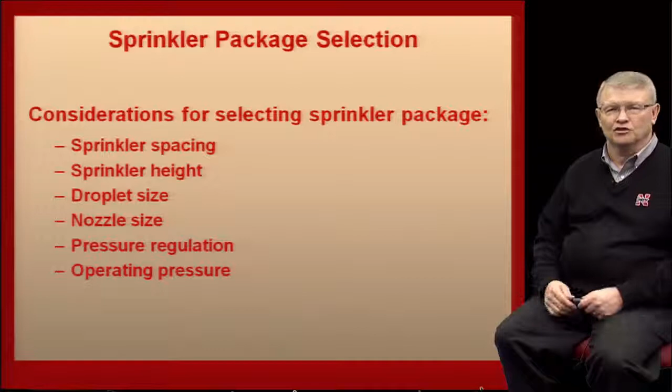And really maybe the most important piece on this whole part is making sure that pressure in your pivot is in the proper range. If I could stress nothing else, I encourage you to go buy a good pressure gauge, put it out on the outside end of your machine, and the pressure you're measuring should be 5 psi above the regulation pressure of your regulator. If you do that, your system's going to be in pretty good shape, unless you have a lot of worn parts. So let's walk through some of this.

When we look at a center pivot, we're looking at where does the water go? How can we most efficiently get this water that we apply to stay in the root zone and be available for crop water use? The spray and the evaporation of droplets, many times I'll hear from people that those numbers are 20–30% of their application. Quite frankly, we cannot show numbers anywhere near that amount. Maybe it's 5–6% on the upside.

And so generally, this is also driven a great deal by the size of the individual droplet that the sprinkler is emitting. And so if we can choose the right devices, we can get larger diameter droplets, as we'll see in a little bit. Those larger droplets are not prone near as much to this evaporation and drift. So for most cases in Nebraska, we're going to recommend going with that little larger diameter droplet, and you really can minimize some of these drift and evaporation losses.

Some of the water we apply stays on the canopy, as we show on the left-hand side. Now that water evaporates very quickly off the canopy compared to the rate of transpiration through the plant itself. What we have found in our research, though, is as soon as we wet this canopy, the transpiration rate basically drops to almost zero. And so there's a period of time while this water that's retained on the canopy is evaporating, the transpiration is reduced. And so the evaporation off the canopy is not a complete loss. It's kind of a net between what transpiration would have been and what the evaporation actually was.

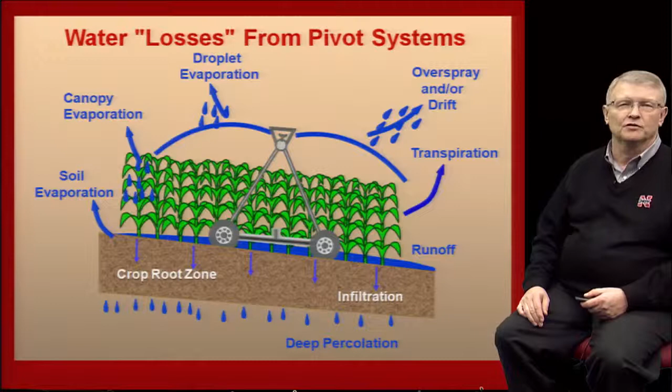We want to be able to select sprinkler packages that will minimize how much water is running off from where it's applied, either going to a low area in the field and leaching water and nitrogen out the bottom of the root zone, or actually completely leaving the field and being used by weeds somewhere offsite. So we're going to spend a fair amount of time thinking about this runoff issue. An important characteristic we have for a sprinkler system is what we call the wetted diameter.

So if I were to choose a low angle impact sprinkler like I'm showing up here, if I put that up on top of the sprinkler pipe, it might throw water 45 feet on either side of the pipeline. So I'm getting a distance along here of the wetted, what we call the wetted diameter. So generally the impact sprinkler is going to give us the furthest distance, going to throw the water the furthest distance.

If I were to put maybe a rotator, a product made by Nelson Irrigation Company, I might put one of those up on top of the system today. There's some new devices out that work real well up on top of the system. It doesn't throw water quite as far as the impact sprinkler, so maybe I only have about 36 feet of distance that's water on each side of the pipeline.

We're still putting out the same depth of water, so if I was trying to put an inch of water on with the impact sprinkler, and I also want to put an inch on with the rotator on top, still going to put on the same inch, but I'm going to put it on a little faster with the rotator. I'm going to have a little higher application rate, but not going to apply it quite as long. Now we have a lot of different choices today.

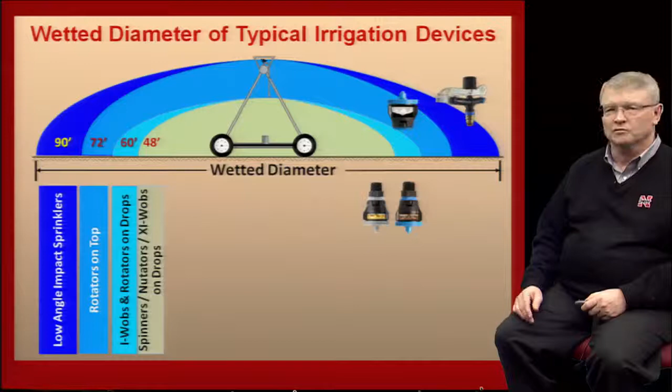You might look at a rotator that we would put then on a drop tube underneath the pivot. That's going to reduce that distance of throw, maybe another 12 feet or so, kind of depends on how high we install it. Certainly it's not just Nelson products, it could be a Senninger product like the i-Wob or variations of their wobbler. As I go even further, maybe I put a spinner out there, or I might put in some smaller devices from Senninger. We might see a decrease in that wetted distance, the wetted diameter that we water.

If we were to put sprays or something up on top of the machine, we might get even less. And finally, if we put some spray heads on drops, put it down just the top of the canopy, I might only be throwing water about 24 feet.

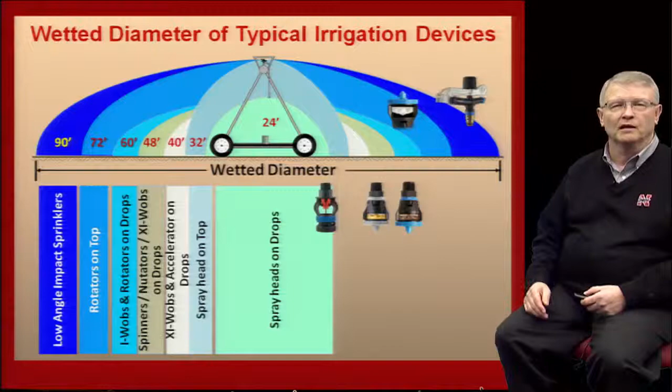Now, we still put the same amount of water on with this system as we did back up here with this blue one. So if I'm throwing it about 1/3 the distance, then my peak rates have to go up by about 3 times. So we're applying water much more rapidly with the system here than we are with the system back up here. And so we have to think about how fast we're applying it compared to how fast the soil can absorb that water.

It also makes a difference in where we locate those devices, either above or within the canopy. So this is showing a situation where we might take a spinner. If it were 6 feet above the soil surface here, then it's going to give a diameter of throw of about 54 feet. If we dropped it down so it was only 3 feet above the ground surface, we might reduce that wetted diameter by about 6 feet.

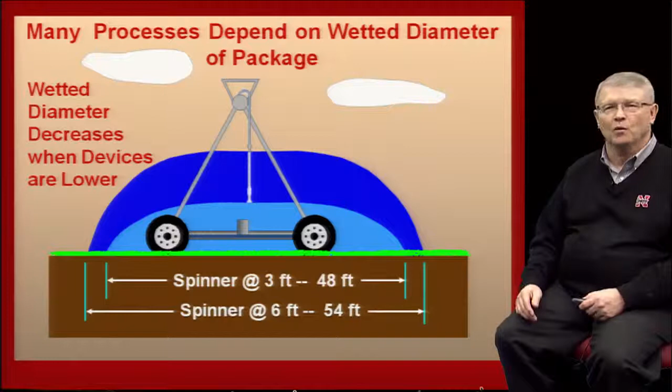And so the height of that device has an impact on this wetted diameter. And eventually that's going to have an impact on how fast we're applying water and what potential runoff we might have. We did some work out at Alliance where we actually put these devices down in the canopy. So we had some spinner devices that were 42 inches above the soil, really about ear leaf height in the field.

There's very little change in that amount of storage. And so what has happened is we have put these devices out. The spacing in this particular field was 12.5 feet. But what we've done is we put those in the canopy. The canopy has knocked that water flow down, and so we're not getting the spread of water that we want

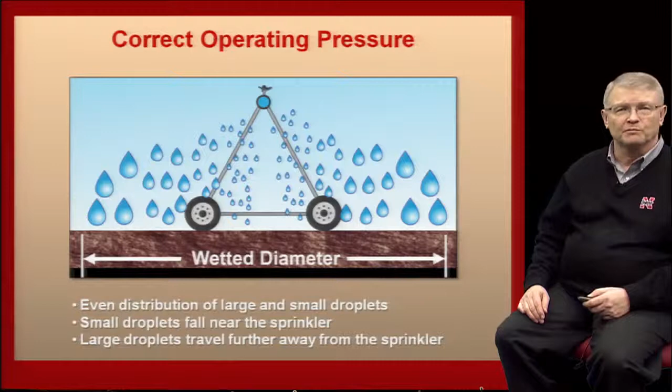Now, if we don't have enough pressure and the pressure is really low, we don't get a very good breakup of that jet from the sprinkler. And so what we get then is a lot of large diameter drops, but also because the pressure is low, they don't have quite the same velocity as they had with the correct pressure. So we get a lot of big drops that don't go quite as far as they did before.

And we end up getting what we call a donut pattern. We kind of get a big donut shape where a lot of the water is applied in that donut. There's a dry area in the middle, the hole of the donut, and we don't throw it quite as far as we did before.

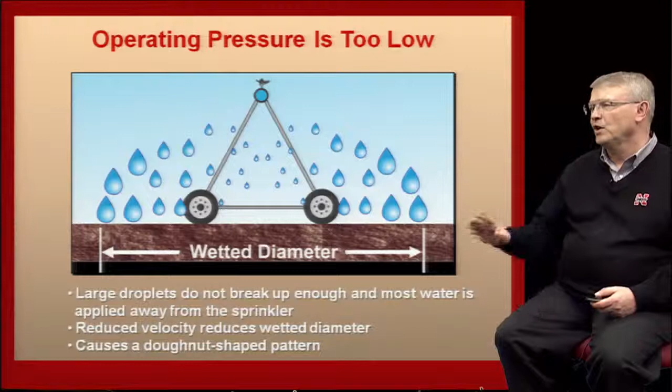So we don't want to be here. We want to make sure we're in the right pressure range for our system. On the other hand, if I run the pressure up too high, what happens is we get too much breakup. And so a lot of the water jet is breaking up into many small drops, almost atomized or almost a mist. What happens here now, we have lots of small drops, they don't travel very far, and so we get water kind of accumulating right around our sprinkler.

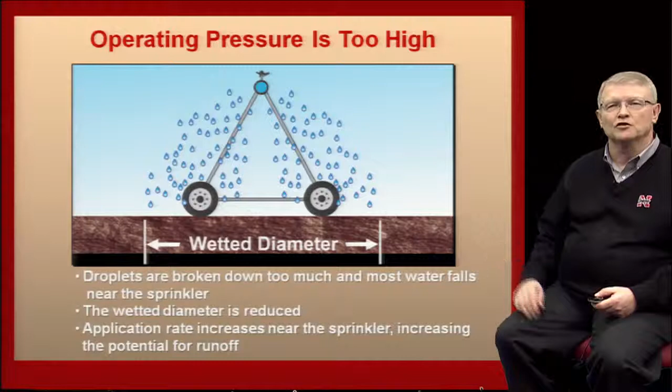And if we have a wind situation, now these drops are free to blow around. So we really need to make sure we're maintaining that device that we're using to apply water in the proper pressure rating that it was designed for, which you can get from any of the manufacturers for your system. There's a wide range that you can operate over, but you need to make sure you're in that correct range.

The other situation we run into is what happens when we put sprinklers on some of the rolling terrain we have here in the Great Plains. What we know is that a 23-foot elevation change in the field represents a change in water pressure of 10 pounds per square inch. And so if we have a device that was designed for, say, 20 psi, when it goes up on that hilltop, it may not have enough pressure in order to maintain the flow.

So what we see in this top diagram is that we may be underwatering at that hilltop because we didn't have enough pressure. We may overwater down here in the valley if we don't have a regulator, because now we have more pressure than we want. If we use a pressure regulator, we certainly can even out the flow rates here in the valley, and maybe even up on the hilltop we might do a better job because more water is in my pipeline to be able to apply to the top.

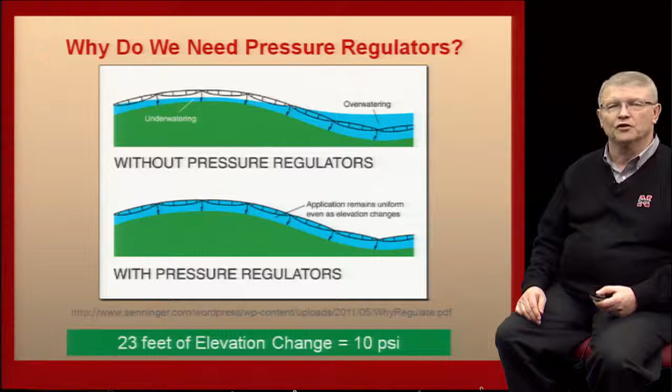So in a lot of cases we need to think about using regulators in some of our rolling fields here in Nebraska. Now, what is a pressure regulator? Well, we're showing on the left-hand side here a regulator. Obviously water is flowing top down in this case. So the pressure at the inlet is one value, and the pressure below the regulator is the other. We call that the outlet pressure.

So what we're diagramming here, this is actually a figure from Senninger Irrigation, is the inlet pressures on the x-axis and the outlet pressures on the vertical axis. And so in this particular case, suppose we have a 10 psi regulator. We're following that pink line as we go up until we get to about 10 psi. After we get off to the right and we get above that, then the pressure tends to level out and we stay at 10 psi on the outlet pressure.

So the whole idea of a pressure regulator is it will maintain a constant outlet pressure for varying inflow pressures once you get above a trigger level. Now, the other thing you'll notice on this device is that there's about a 5 psi loss of pressure through the regulator itself. And so if we designed our sprinkler package, in this case, to have that wobbler device operating at, say, 10 psi, I would want to have 15 psi available above the regulator to account for the pressure loss due to friction within the regulator itself.

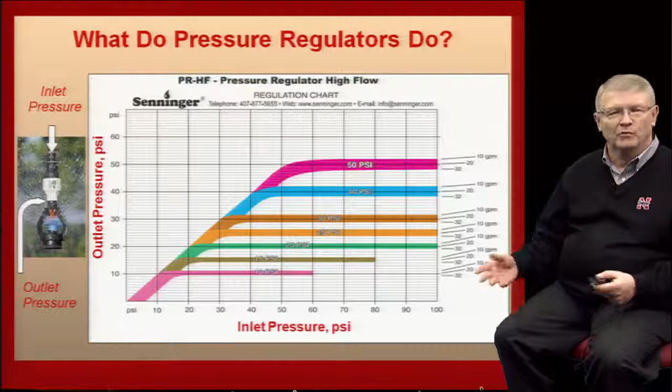If you get it far in, up on the hill, and if your pressure is 5 psi above your regulator, then you're doing a pretty good job. If it's a little more than that, it's fine. If it's quite a little less than that, then we've got a problem between the pump and the well, most likely. So this is what a regulator does.

The other important characteristic we have from sprinklers is the size of the nozzle. This is a chart from Nelson Irrigation Company, and they label their charts here. The example we're showing on the left is a size 26. So we have a white colored nozzle with the number 26 stamped right on it. Over here is the column for the white 26, and it's showing, for pressures from 6 to 50 psi, how many gallons per minute is flowing out of that device.

What we know is when you double the pressure, you're going to increase the output through that nozzle by about 40%. If you double the size of the nozzle, so if we go from a 13 to a 26, we would get 4 times the flow of water out of the device. Nelson sizes their nozzles by 128ths of an inch. So a 26 nozzle is 26/128ths of an inch.

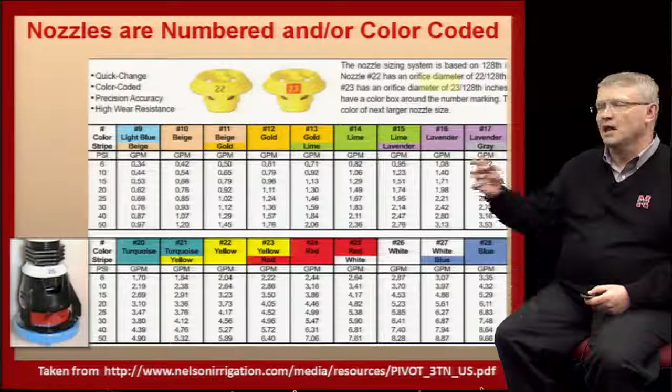The other thing they've done is they've color coded these nozzles. So if you have this chart, you can look at the color and know what size nozzle it is without having to climb up there and look to see what the number happens to be on the nozzle.

Well, what happens if we don't have the right pressure? This is looking at a pivot with 30 psi regulators designed for about 750 gallons a minute. We're looking at distance from the pivot point and the depth of water that's applied. What we'd be looking for is a system like the green up here at the top. That green is what would happen if you had all the pressure that you needed. For this particular device, our design pressure at the pivot point was 49.5 psi. And the black line that we see here, not a lot of difference.

What happens if our pressure at the pivot point drops too low? Suppose the pressure in our pipeline dropped to 31.7 psi. The white line is showing the distribution of water along the pivot when we didn't have enough pressure at the pivot point. Not a lot's happening on the inside part, but a lot is happening on this outside part. So we tend to underwater the outside part of our pivot.

With a normal 7-span machine, about 25% of your land area is under that outside span. So when we don't have enough pressure in a pivot, we end up underwatering that outside span, and that causes us to have less water applied on about 25% of our field. So we really need to check that pressure and make sure we're keeping it in the right zone.

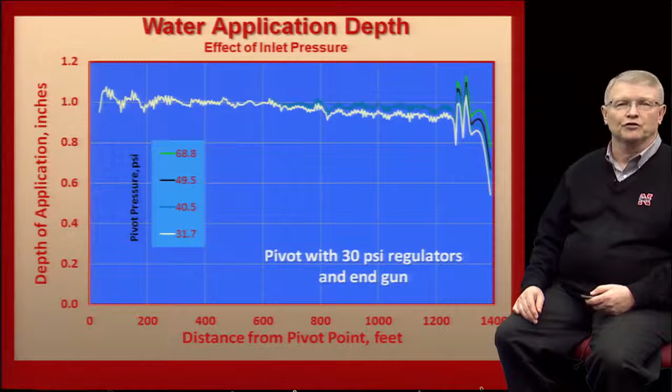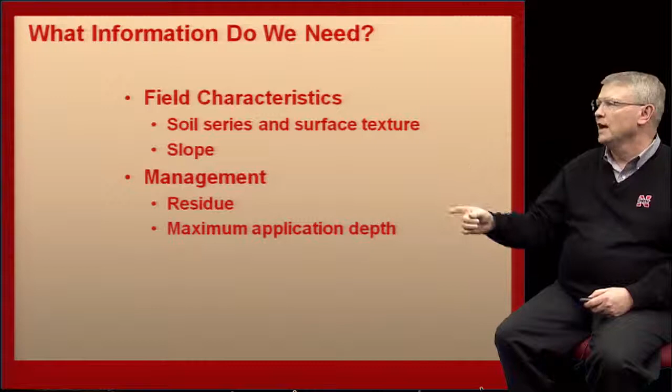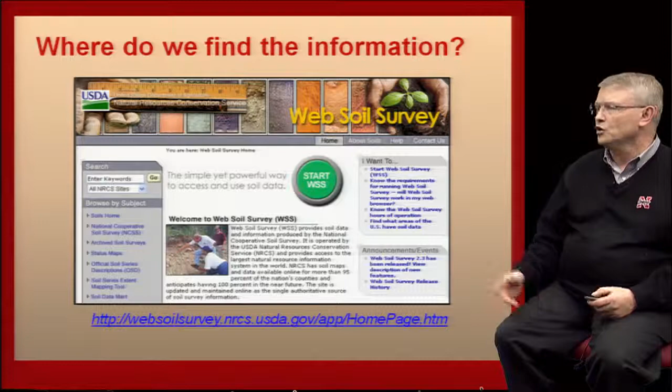So what information are we going to need? We need to look at the characteristics of our field, our soil series and texture, our slope, and then think about managing for residue and the depth of water we apply. We really encourage you to look at this product developed by the USDA Natural Resources Conservation Service; it's a way to get a soil map for your field. It's not perfect, but it's a really good way to hone in on your individual location. You go to this web page, click on the Start WSS button in the middle, and eventually you'll come up with a diagram that looks like this.

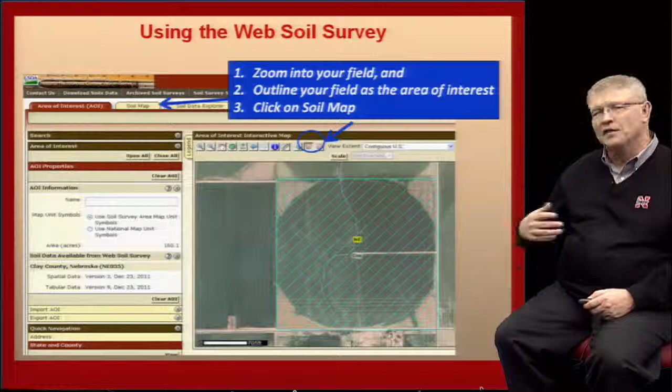So you click that little button there that's in the blue circle. That brings up a little blue rectangle. We stretch that rectangle over our field, and then we simply click on the soil map. So now that's told it what land area we want to look at in the background picture. Once we've done that, then we can click on soil map, and this will tell us the soils in

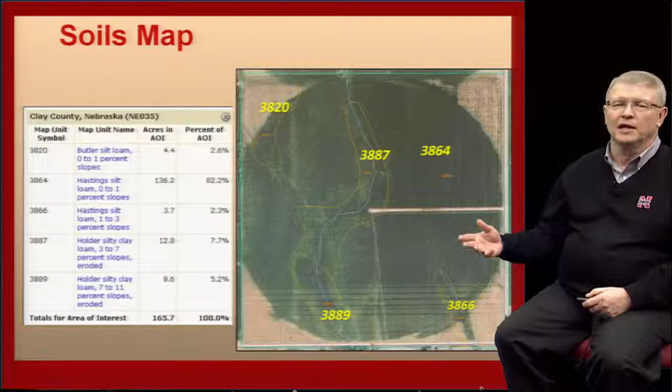So you get a map of the soil types in your field. Now this is what you would have gotten if you had gone to your old paper copy and looked at it for your field. Very handy to do this on the internet, pretty easy to do. So from this we get our soil types, and we even get some slope that we can use. And so we have some guides. If you look at some of our programs, go out to the water website, you'll find some tools you can use to help you identify and select some sprinkler nozzles that will avoid runoff for you.

And so if you get out there when you don't have a lot of crop growing, you can see these problems very easily, and it doesn't take much to fix some of these things. If it's a leaky gasket here, it's a little more involved, but not so bad. Certainly getting rid of plugged systems or leaking nozzles. You can also watch the devices and see if they're operating like they should.

Sometimes we recommend that you go out on that outside span. Maybe you buy a new regulator and get a new device that matches your other one. Put it in there, put in the right size nozzle that you had before, and just compare how the system operates with the new equipment compared to the old one. You only need to do a couple of drops on a span. If your old system's rotating at about the same speed as the new one, you're probably okay. If the old ones are going around a lot faster than the new one, maybe it's time to think about making that upgrade to that sprinkler package.

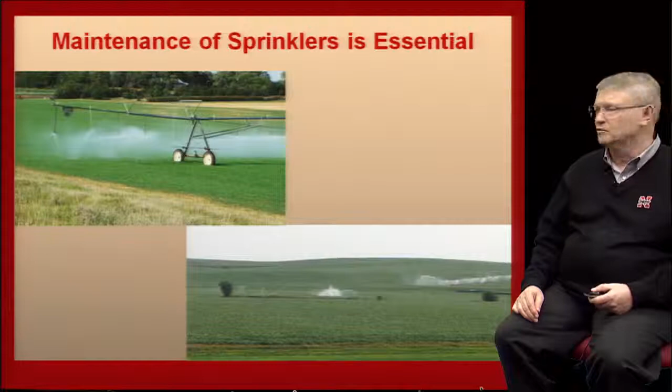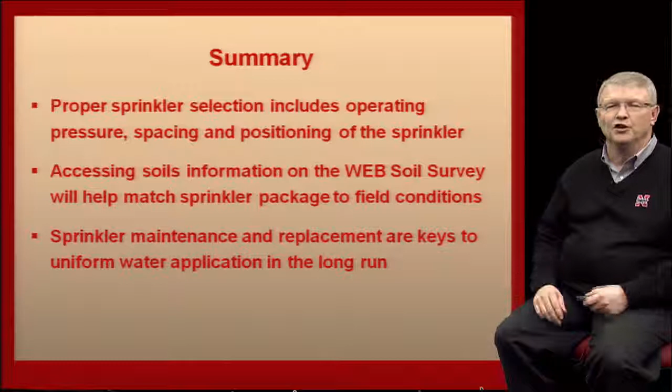So some summary here: what we really want you to do is think about selecting the right kinds of nozzles for your field, the right kind of devices. We can do that by looking at the soil survey, and we have to maintain that system in order to achieve the potential high efficiency that we get with center pivots. They really have the ability to do well, but we have to manage to achieve that level. Again, this is a cooperative effort amongst various agencies and the university, and we're thinking about how we can improve irrigation management to minimize deep percolation and protect water quality.